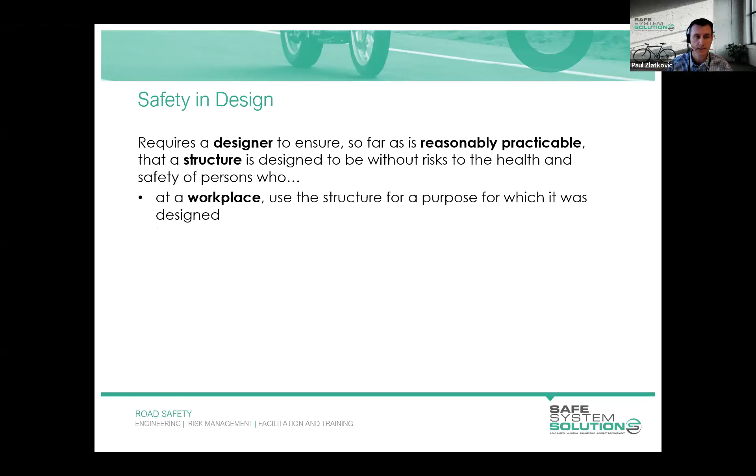So let's go. Safety in design - this is a straight up definition. It requires a designer to ensure that, as far as reasonably practicable, a structure is designed to be without risks to the health and safety of persons. There are four steps here: at a workplace, use the structure for the purpose for which it was designed; construct the structure at a workplace; and carry out any reasonably foreseeable activity at a workplace. That could be manufacturing, assembly, maintenance - a very common activity - or demolition or disposal at the end of the life of a structure.

But safety in design also relates to considering those who are in the vicinity of a workplace and are exposed to the structure, or any of those above activities.

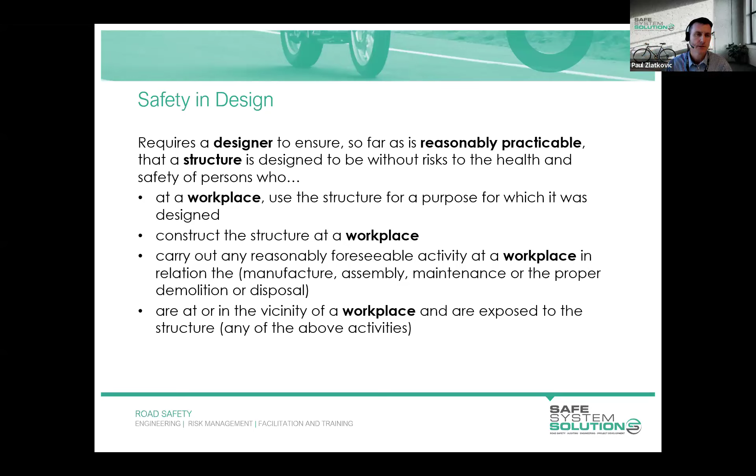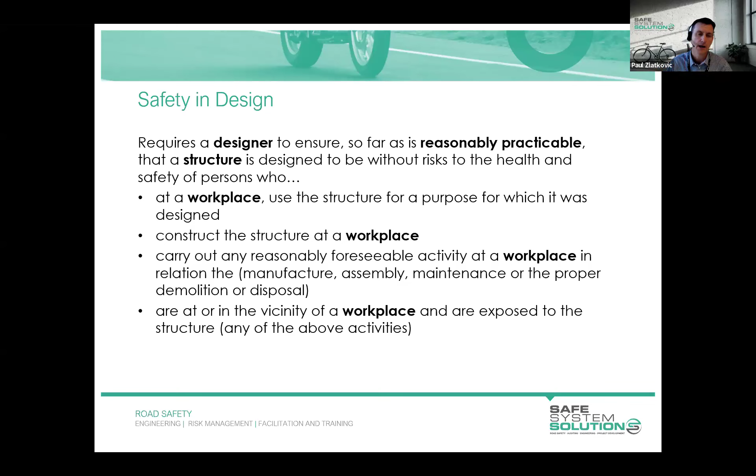You'll notice some of those terms are in bold, and it's really going to be important to have a strong understanding of them: designer, reasonably practicable, structure, and workplace. We're going to delve into what each of those terms mean, through some interactive elements, to give everyone a chance to be involved.

We're going to run a series of polls initially, and there'll be other questions where you'll be asked to contribute some answers in the chat. If you haven't found that chat window, have a look for it now. I can see that Tony's found it - he said good day. So make sure you can access the chat, and there'll also be those polls that I mentioned.

Well, it can be all those places, or it is all those places, but it's any place where work is carried out for a business or undertaking, and includes any place where a worker goes or is likely to be while at work. So under the Work Health and Safety Act, a workplace covers many places beyond the traditional view of what a workplace could be.

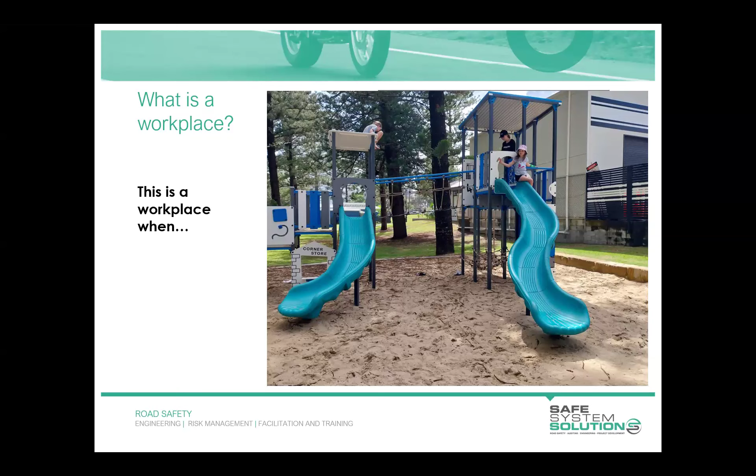I noticed this one does say single choice again, Paul. Yeah, okay, I'll have to fix that up. Sorry, I just noticed that as well. So it is select all that apply. Okay, so if you want to, there's a couple of, I'd say, correct answers there. So if you select one of those, then that'll be great. So not sure why that reverted from multi-choice to single choice. Yeah, Shannon's just advised that you can only choose one. So yep, okie doke.

All right, well we'll wrap that one up there. I think we've almost got all the responses. So noting that you can only select one, and the one that most people select is certainly correct: additional play equipment is installed in accordance with the park master plan.

The other one that was also correct is the tree next to the park was trimmed by a qualified arborist, and the assumption there, which I didn't state, is that someone trimming a tree in a park is usually engaged by council to do that, or employed by council to do that. So that is also an example of a workplace.

When children play on the equipment, it's not an example of a workplace - no one is undertaking work in that situation. Similarly, when a children's party is held in the park and food is ordered from a delivery service, it's the same principle as I mentioned with the driver: whilst they're making a delivery, their workplace is considered their vehicle. So in that case, it wouldn't be a situation where the park is a workplace.

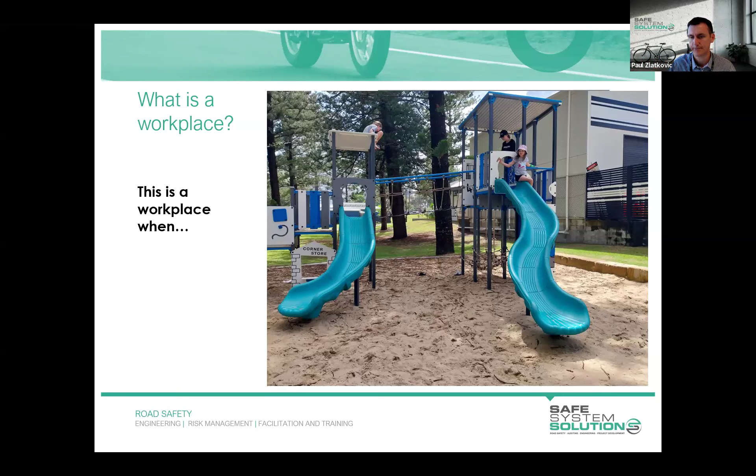Apologies for that poll. So we'll move on now and talk about what a structure is. I'm going to talk about what we think of as structures - is it buildings? Is it maybe tall buildings, bridges maybe? Because those are sort of the words we think about when we hear the word structure.

Well, yes, those are structures, but under the Work Health and Safety Act, a structure means anything that is constructed, and that could be fixed, movable, temporary or permanent. This includes buildings, masts, towers, pipelines, transport infrastructure - so that could be bridges, roads, underground works, shafts and tunnels. It includes any component of a structure or any part of a structure.

In the early days, when this form of work health and safety legislation was released, the term structure threw a lot of people off, particularly those in the road transport space, because we didn't typically refer to roads as structures. Most people thought of structures as buildings or bridges. So when that legislation came out, there was a misconception in industry for at least the initial time that, because it's referring to structures and we're doing a road, we don't really need to undertake a safety in design assessment. That's been ironed out many years ago, but just to flag that the definition of a structure is quite broad, so it's important we keep that in mind.

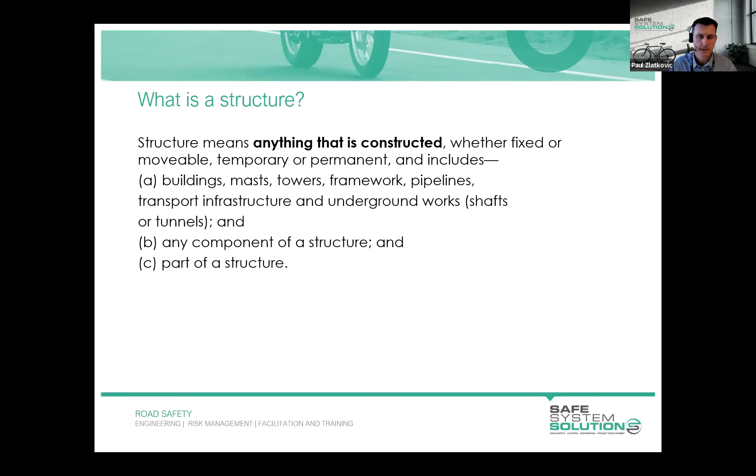So let's run with some more polls. This time I'm going to show you an image, and the poll will give you some options, and I'd like you to select all that apply. So what is a structure in this photo that you can see?

It's the Bribie Island Bridge, and you've got some options. Is it the water under the bridge itself, the dumped rock you can see in the foreground, or the pipe attached to the bridge? Let's see what we think a structure is out of those options. You can select more than one. You've got the multi-choice back on this poll.

Wonderful. Give it another 5 seconds. Excellent. Thanks, Loretta. Let's share this poll.

So wonderful. No one thought the water under the bridge was a structure, and that is correct. It hasn't been constructed. It's Pumicestone Passage, so it's a natural feature. The bridge has certainly been constructed.

The dumped rock, even though you can refer to it as dumped rock, is actually constructed, even though it looks like it's been placed in a dumped fashion. It's been placed there with a purpose. So a rather basic form of construction, I guess, but it is a structure. And the pipe attached to the bridge, so part of a structure, anything attached to the structure, another structure, would also be considered a structure.

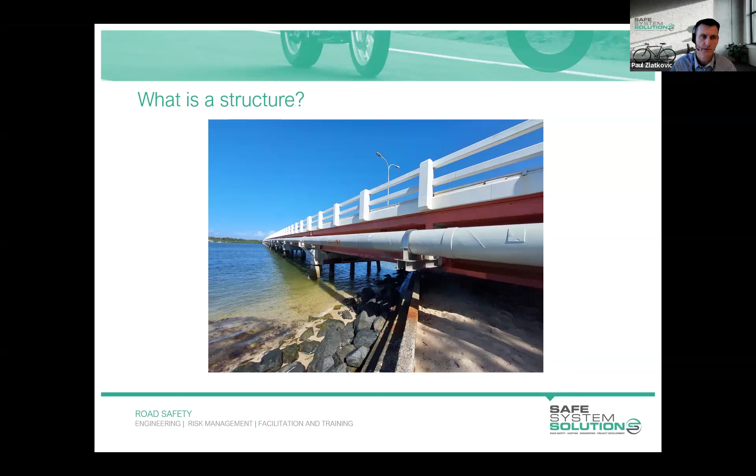Those are your options. You can select more than one. Let's get a few more answers there. And remember, you can win prizes by asking good questions or making comments. So don't be shy.

All right, let's end this poll and share the results, Loretta. There we go. Almost everyone thought the sealed part of the road was a structure. Certainly is. It's been constructed.

The trees are an interesting one. In this case, assuming those trees are pre-existing part of the natural environment, they wouldn't be considered part of a structure, or the road, if the road is the structure.

The gravel shoulder, yeah, that's been constructed as part of the road, so that's considered a structure. And the fences, even though they're quite a basic level of fence, post and wire type construction, they have been constructed. So yep, everyone's on board with that, and they are a structure.

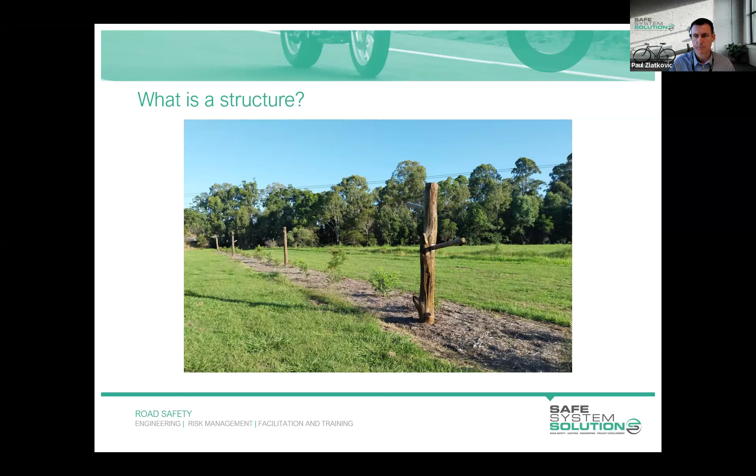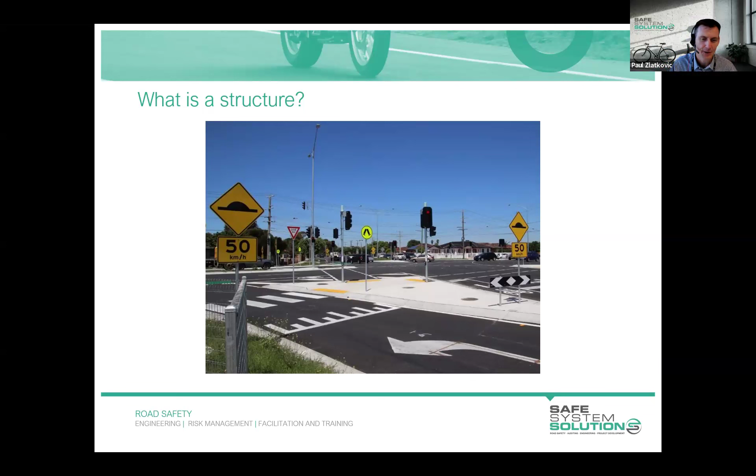All right, I think we can end that poll there. I think everyone knows what's coming up here. So sharing the results, yeah, everyone can see that this is a very built environment. I think everything in this photo has been constructed, so everything would be considered a structure. Trying to catch someone out, but I don't think I've done that in any of the groups that we've had there. So let's crack on to the next one.

Prize if anyone can tell me the road that this is, and I'll give you hints - in Moreton Bay - so that narrows it down a little bit. Narrows it down to about 200,000 kilometres of road. Can't give prizes away too easily. Campbell's Pocket, no, it's not Campbell's Pocket. Towards Samford, yeah, it's getting warmer there. Andrew, the Wynn Road, it's not Wynn Road. No, all right, I might not distract myself by looking at the answers, but we can come back to that.

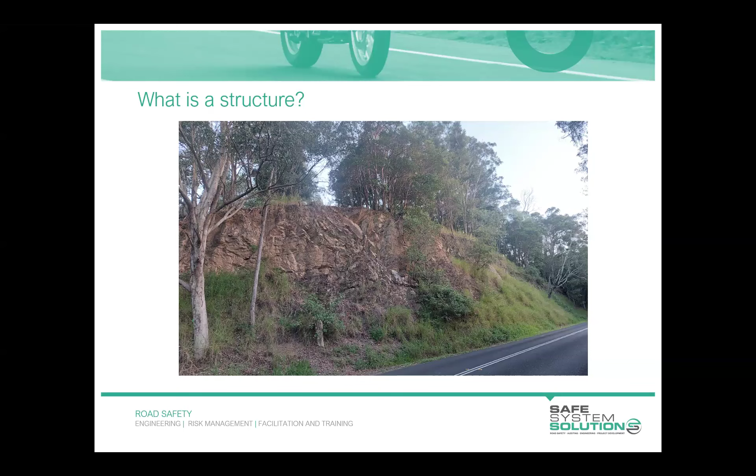Answers rolling in. We do have a question that's come in, which we might answer after this poll's done. Let's go. Okay, I think we just got it, just about everyone on that poll. So let's end the poll and share the results. So looking like we've got almost 100% across the board there, and yep, everything in that image is constructed.

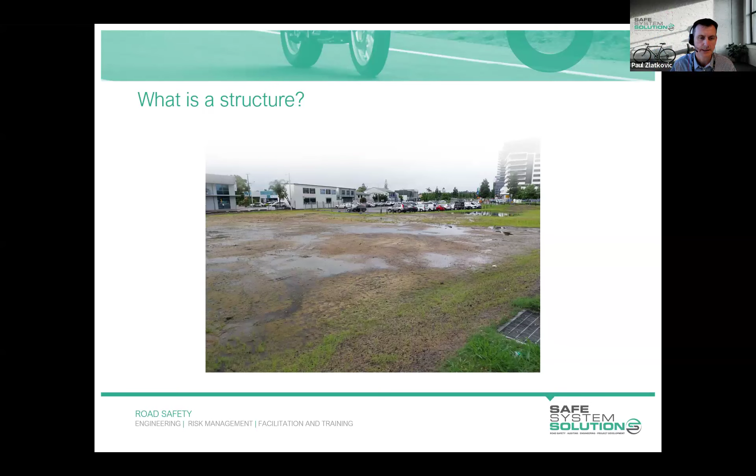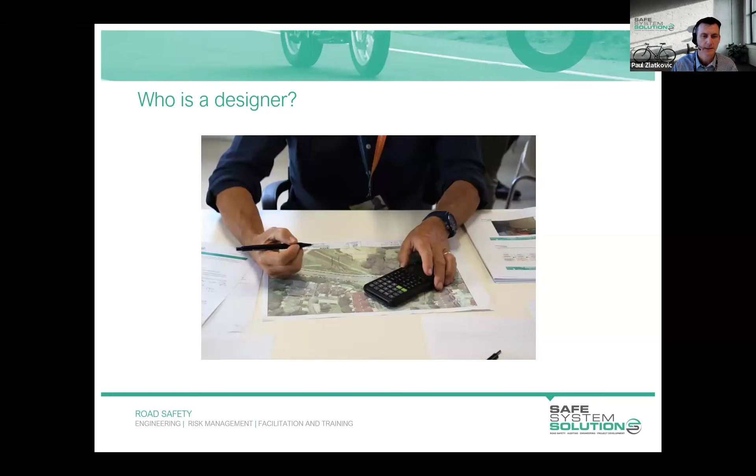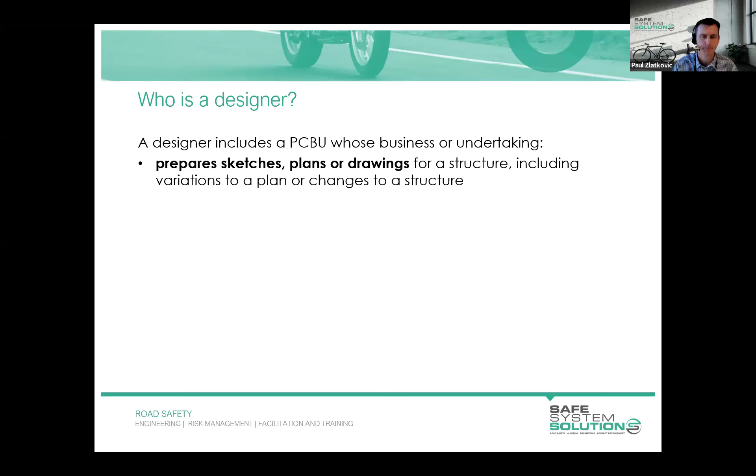Yes, they are designers, but under the Work Health and Safety Act, a designer includes a PCBU whose business or undertaking involves preparing sketches, plans, or drawings for a structure, including variations to a plan or changes to a structure. Also, anyone that makes decisions for incorporation into a design that may affect the health and safety of persons who construct, use, or carry out any of those other activities in relation to the structure.

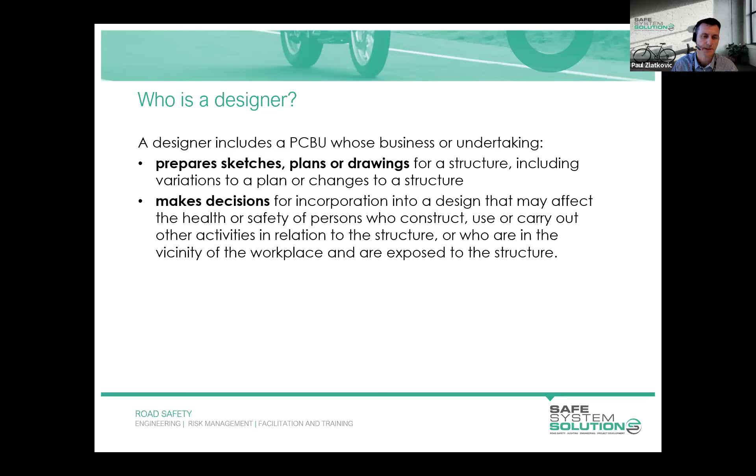So it's important to understand that the role of a designer and design activities is not just someone that is on the tools, someone making and preparing a calculation, but it can involve anyone that makes decisions around a design that can affect the health and safety of persons in relation to all those other activities - construction, maintenance, demolition, any of those activities we saw in the initial definition of safety in design.

I just want everyone in the chat now to write the name of roles that you think would be a designer under that definition in the Work Health and Safety Act. I think most of you will see where the chat window is. That's it, I can see Chris.

Landscape architect, definitely. Architect, engineer, environmental planner, yep. Traffic engineer, urban designer. I think, Marco, you said we've got parks planning today, urban design today. Majority parks planning, yep. Yeah, great. Green infrastructure, a couple of engineers and designers.

Josh is putting councillor there. Yep, we've had that one a couple of times. So if a councillor makes decisions that can affect the health and safety of a structure, then yes, they are considered a designer under the Work Health and Safety Act.

Industrial designer, your project manager, yep, Tony. That's right. If they're making decisions around the structure, around the project that they're managing, so certainly.

So I've got a bit of a list here. I think some of those have been already mentioned in the chat. Got surveyors, got town planners, civil designers. I think we've even had temporary works designers or engineers fit under that definition of designer.

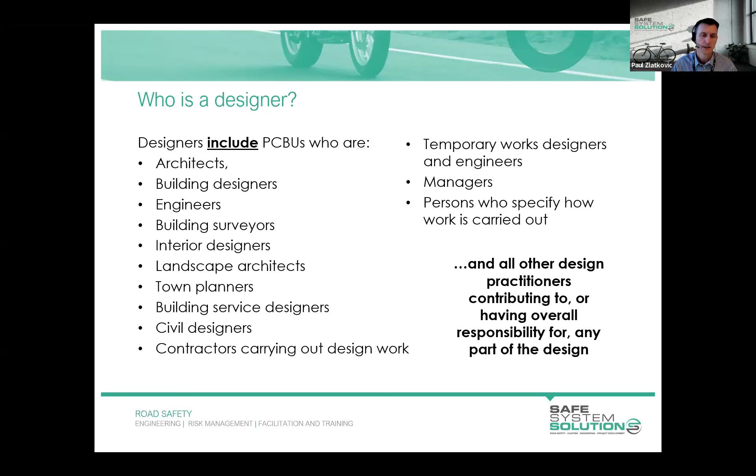So just to affirm those key points: any variations to a plan or changes to a structure - so if you're out in the field in that construction, implementation, delivery type phase, and you make changes to a plan without consulting that designer, then you take on that role of designer. As I mentioned, designer includes those who specify how work is carried out, and contractors carrying out design work.

The next point I want to talk about is the term reasonably practicable. Remember that safety in design requires a designer to ensure that so far as is reasonably practicable, a structure is designed to be without risks to health and safety.

So how do we decide what is reasonably practical? It requires consideration of the likelihood of exposure to a hazard, the degree of harm or consequence from that exposure, and the availability and suitability of ways to eliminate or minimise the risk. That in turn requires some knowledge of the hazard to identify suitable ways to eliminate it - we really need to understand the nature of the hazard we're considering. Lastly, it also requires us to consider the cost associated with eliminating or minimising the risk and whether that cost is grossly disproportionate to the risk.

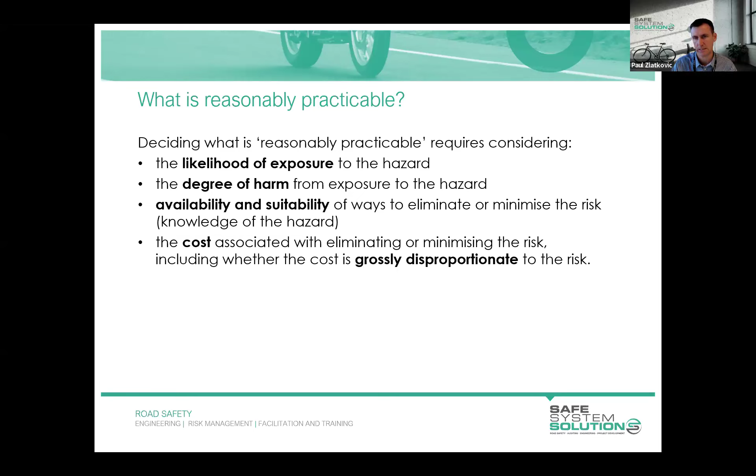So we've got more polls on the way. Let's look at this one as a first one. I'm going to describe a hazard associated with that photo, describe a risk, and the poll will give us a number of ways that may or may not be reasonably practicable ways to eliminate or minimise the risk.

In this case, the photo describes a road with some overhead lighting. The hazard is working at heights, and the risk event is someone falling from height while changing a light fixture.

So we're going to have a look at that poll now. Loretta, not going to make that mistake again. If you could launch the poll - there it is.

Let's have a look at those options there. If you think that one of those options is a reasonably practical way of eliminating or minimising the risk of a worker falling from height whilst they're up there changing a light fixture, then select it. You can select more than one, so there might be more than one reasonably practical way to minimise or eliminate that risk.

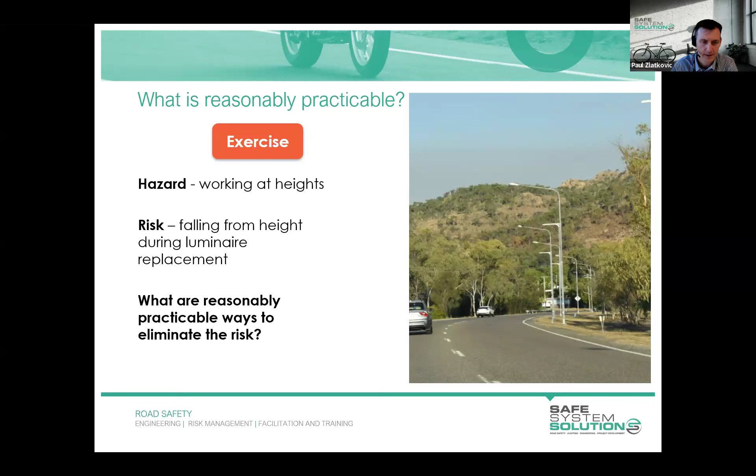Let's jump into the next example there. In this case, our exercise is looking at a hazard, which is working near water.

So this is a cliff stabilisation project, or a photo from a project, and it's at Scarborough. It's one of the designs in your small group exercise tomorrow, so some of you might be in a group that is looking at this design.

So the hazard is working near water. We're in a coastal area, we've got some tidal influence there, so it'll be sort of high tide, low tide type action. The risk is drowning, and I've got that as drowning when working on the cliff stabilisation. It could just be you're inundated by water, and I guess drowning is one outcome, one consequence, but it could be certain other consequences there.

Let's launch the poll and see what options there are. So what could be some reasonably practical ways to minimise that risk of drowning when working on the project down there at sort of sea level or beach level? So the options are: work only during low tide periods, construct a temporary cofferdam in Moreton Bay for the limits of the project, use a lookout to warn of big waves, and undertake works from the cliff top.

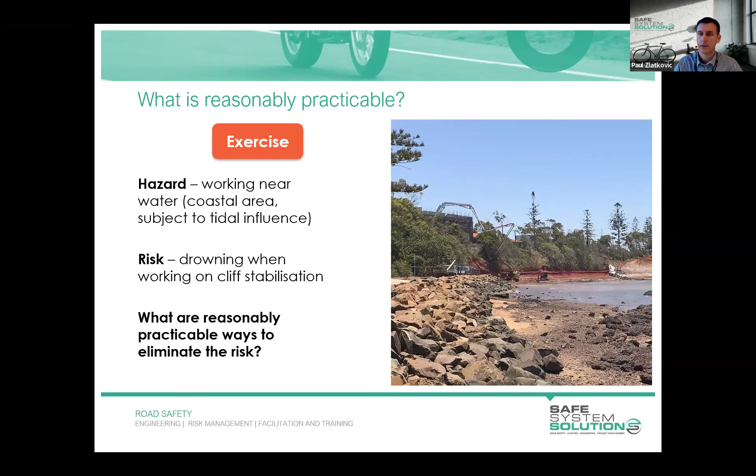Undertake works from the top of the cliff - yeah, that certainly is an option there, and you can see that the concrete pump is positioned in the photo on the top of the cliff. So there's certainly an element of some works that could be undertaken from the top of the cliff. Maybe not all the work, but certainly some of it. So well done, let's go to the next one.

But in this situation, the hazard that I've identified is working near live traffic, and the risk is a vehicle that is passing crashes into workers maintaining that landscape median. So let's look at the options in the next poll and see if we think they are reasonably practical ways to eliminate or minimise the risk.

Option 1: maintain the median when the road is closed with diversions in place. Place warning signs of workers on the road. Use a lookout to warn of errant vehicles. Use a median treatment that does not require maintenance by workers on the ground.

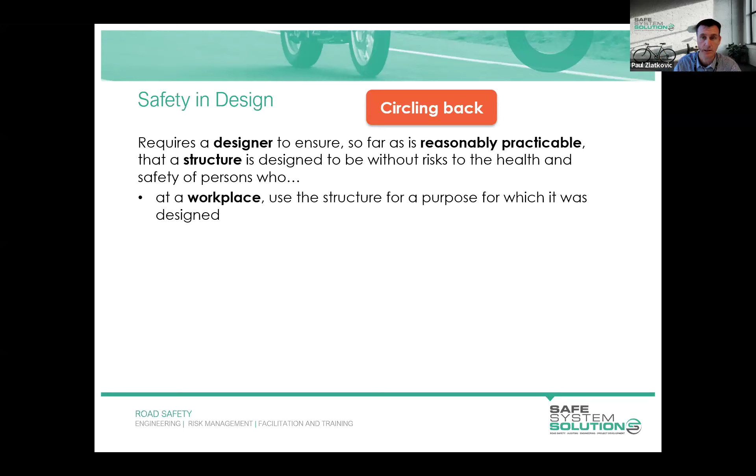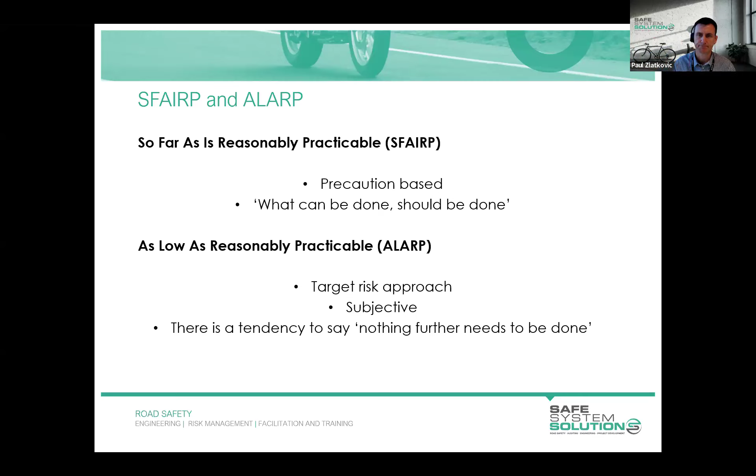Moving on to the next consideration, around knowledge and capability. Many of the projects you see these days are often quite complex, and there's an increasing tendency for this, so it's often the case that not just one person has a full understanding of the project. In terms of our roles in the engineering world, over the years there's been a greater move to specialisation in technical disciplines for a range of reasons.

So that combination of projects being more complex, and a tendency toward specialised roles in engineering disciplines, makes it really unlikely that one person will have a full and complete understanding of a design project. In practice, that means safety in design is not a one-person job - it involves a group, a small team of people, so that a full knowledge set and capability is represented when we undertake our safety in design assessment.

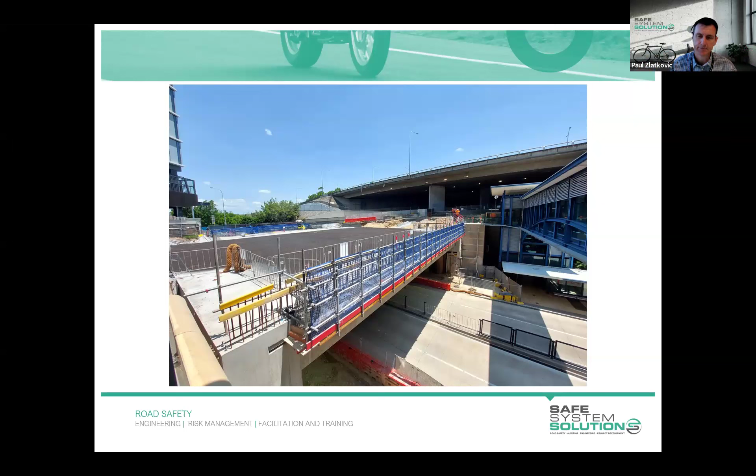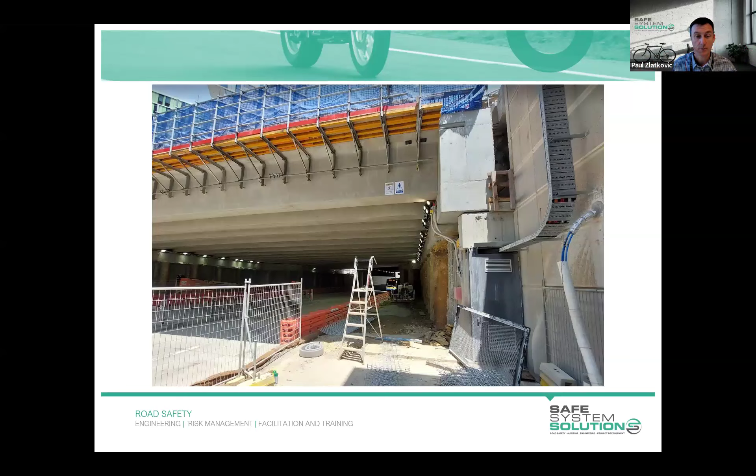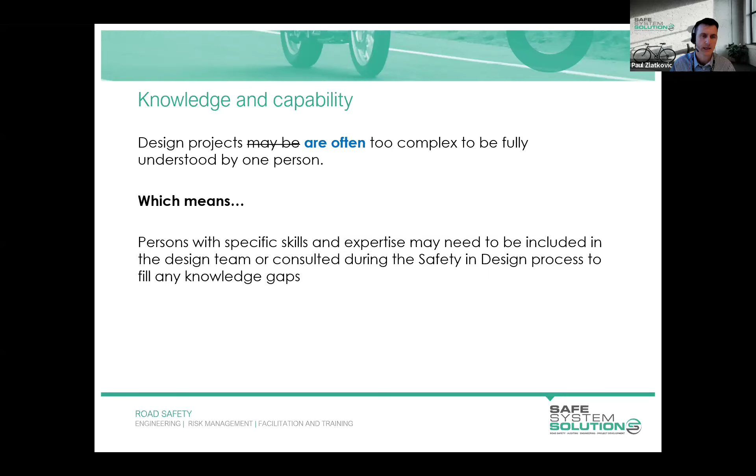Design projects are often nowadays very complex, too complex to be fully understood by one person. So we need to make sure persons with specific skills and expertise are included in a design team, or consulted with during the Safety in Design process, to make sure there's no gaps in knowledge. I've been involved in Safety in Design assessments that have included anywhere from 3 or 4 people up to around 25 people for very large scale projects, and that's necessary to get all skills represented when we undertake our Safety in Design assessment.

So this is a very incomplete list, just a number of skill areas I could think up on the fly that might be involved in some of the projects undertaken by the City of Moreton Bay. If you know of any skill areas not on this list that you would use at council, just pop them in the chat.

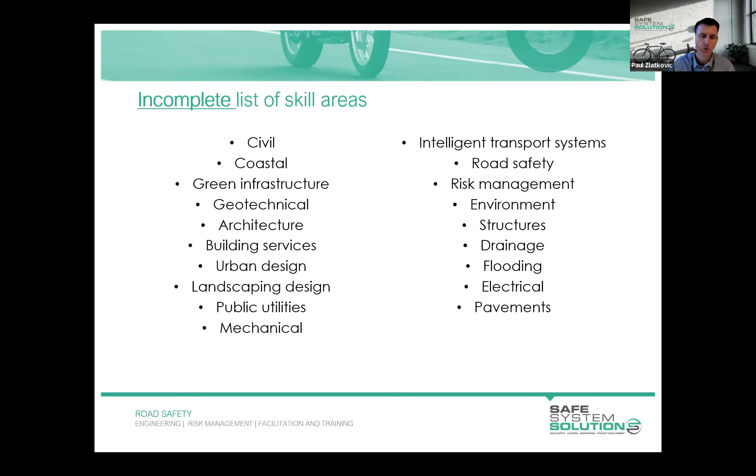We'll move on to an activity where we'll have a look at a few photos. As a group, we can identify some of the skill areas that would have been required or involved in the design of these structures, and in turn those are the skill areas that would expect to be represented in a Safety in Design process.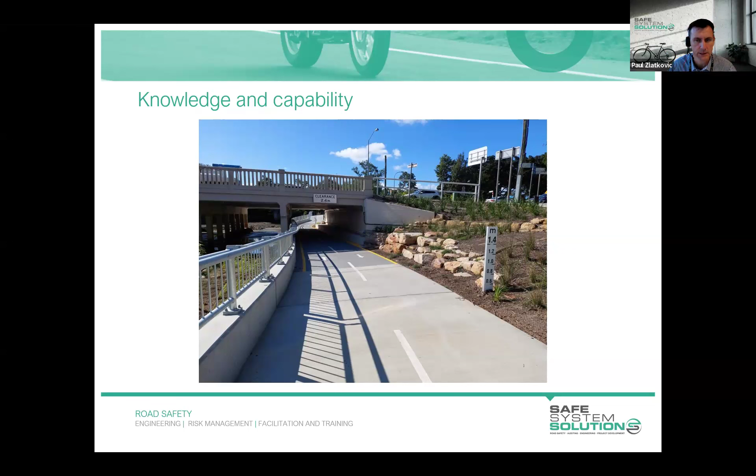I won't give another prize away for this. It is Old North Road again, not far away from those koala resting poles we saw earlier. So in the chat, let's identify some of those skill areas, those knowledge areas that would have been required for the design of this part of Old North Road.

Traffic, AT, there's a transition ramp there, yep. Energex Powerlink, yep, spot on. Ryan: electrical, civil designer. Yeah, active transport, green infrastructure. There's a culvert there, you can't really see it from the photo, but maybe the location. There's fauna fencing above the culvert, so access to maintain that fencing is important. So seeking the input of someone with green infrastructure experience, landscape architect, urban planner, structural engineer, landscape architects, urban designers for planning input. Yep, that's spot on. Wonderful.

Okay, let's go to the next example here to get our thinking caps on. For this one, a bit of a unique situation: the Bribie Island Bridge that you saw in an earlier photo, and this is on the island side. It's another shared path, and this shared path has been retrofitted under the bridge, which has been there for a long time, so it sneaks under the bridge to provide a continuous path along the island side of the bridge. So who would we need to involve in this case to make sure we've got the complete knowledge and capability around this structure?

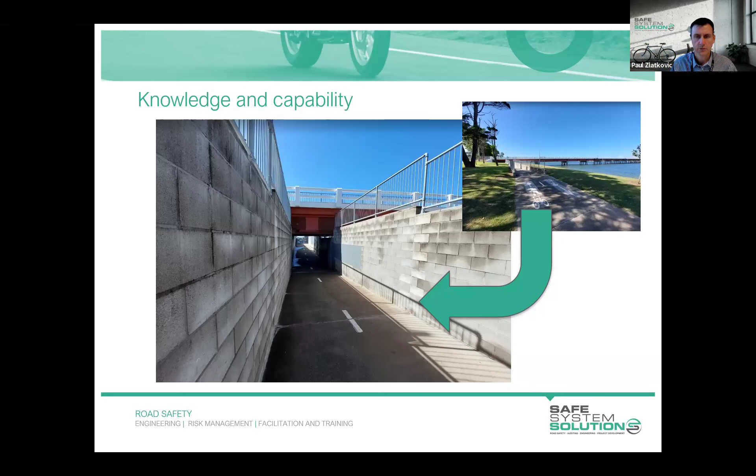Okay, that rolls us nicely into the next consideration. Hand in hand with the capabilities of designers, those skill and knowledge areas we're talking about, it's also necessary to draw on the knowledge and experience of others, and that can include manufacturers, suppliers, and importantly workers - workers that construct a structure, workers that maintain a structure. Remember, any of those other activities that will occur once the structure is constructed need to be considered. So by involving those workers that will actually do the work, we add to that pool of knowledge that we have when undertaking a safety in design assessment.

It's really important that it's more than that - actually, it's a legal requirement that workers are consulted as part of the safety in design process.

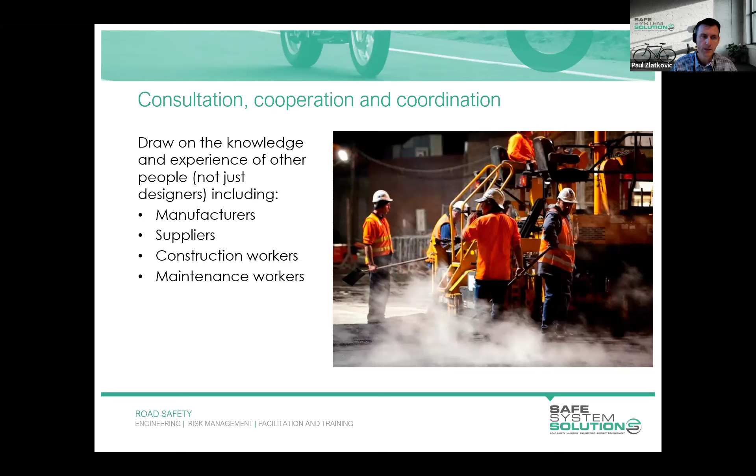You think it might be a good idea, so you're thinking of using it as part of your design. If that were the case and you didn't have the knowledge of that product, then you really need to involve those manufacturers and suppliers in your safety in design process. Consult with them so that we don't have any knowledge gaps when doing our safety in design assessment. So it's really important that we think about workers and also those manufacturers and suppliers of the elements of our design.

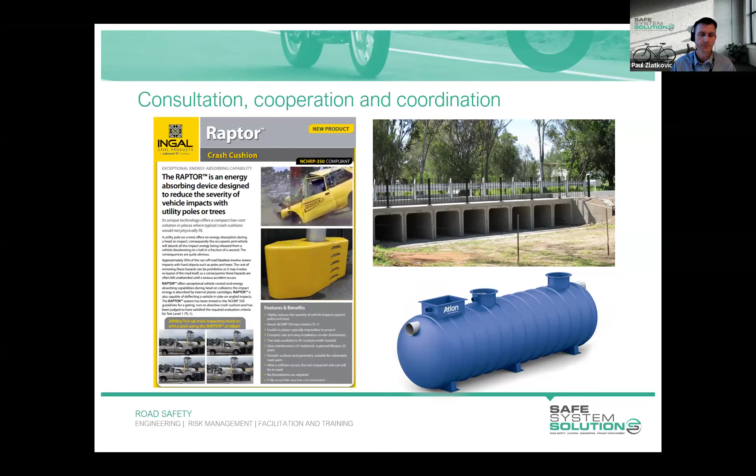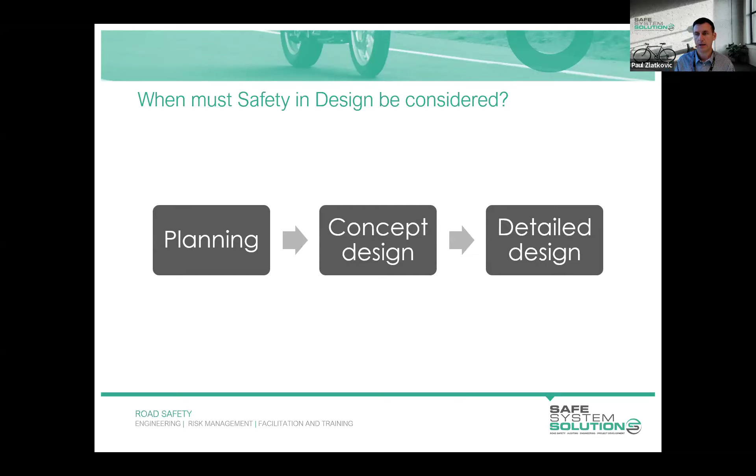So we'll run another poll here. The question is: when must safety in design be considered? We've got the three phases of council's design life cycle - planning, concept design, and detailed design. So Loretta's started that next poll, which asks at what time in the planning or design of a project should the consideration of safety in design commence.

So as early as possible is an option, after a request from a contractor - so once they've started construction, you need to get them that safety in design report, once they've requested it. That's one option. When you've got through 75% of your detailed design is another option - you really know about the design by that stage, or after the design is certified. Sorry, I've jumped around in the order there a little bit.

So I think there is a clear answer there, and I can see it appearing. So we can end the poll there. I don't think I was able to fool anyone, but of course it's as early as possible in the design process. And the reason we do that is that the early stages of a design provide the greatest ability for us to influence the design outcome, and importantly, influence the health and safety attributes of a design.

So when a design reaches a more detailed level of maturity, it's very hard to make changes without impacts to cost and time. So whilst we say as early as possible, there's an acknowledgement that in the planning phase of a project, particularly in the very early stages of strategic planning, you won't have a lot of design definition or design maturity, but that shouldn't stop you from starting to consider safety in design. We'll talk more about that in module 2 when discussing how we apply our safety in design process. It's really important we start thinking about it early, even if we don't have a lot of design development under our belt.

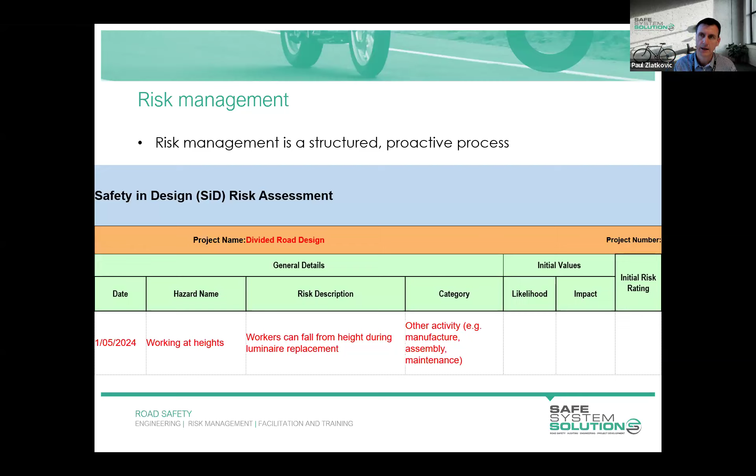Some common questions I've heard along my career: can we combine our project risk assessment with our safety in design risk assessment? Can we have a combined safety in design and risk workshop? I really think it's important that we keep safety in design separate, because it's quite a distinct consideration of workplace risk. And if we start involving some of the other risks - that might be reputational risk, risk to environment, risks around end users not in a workplace setting - if we start mixing it all together, it can become somewhat confusing. So it's really important to undertake a separate safety in design risk assessment.

So some hazards and their associated risks are pretty well known. We understand that, particularly in construction, there will be risks, and when we're aware of a risk and its effective control is known, then we can implement those controls without undertaking additional risk assessment. The benefit of this is that it allows us to focus our safety in design assessment on the more unusual or atypical aspects of a project that might involve a new process, a new material, or a new product. We can focus on those without reinventing the wheel in terms of risks that are well known, where we have effective controls.

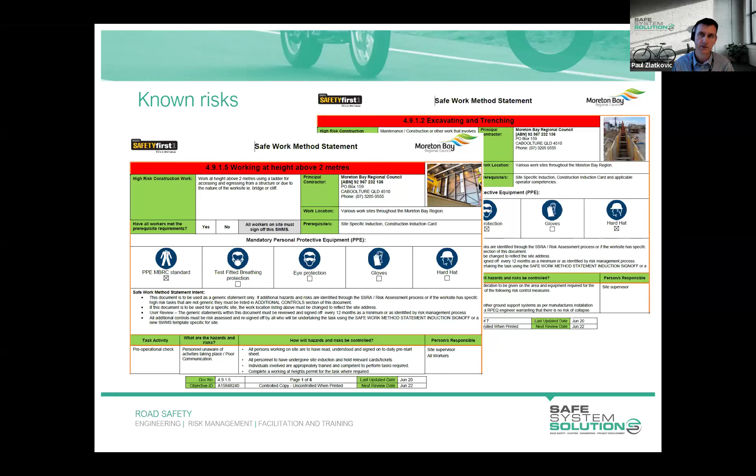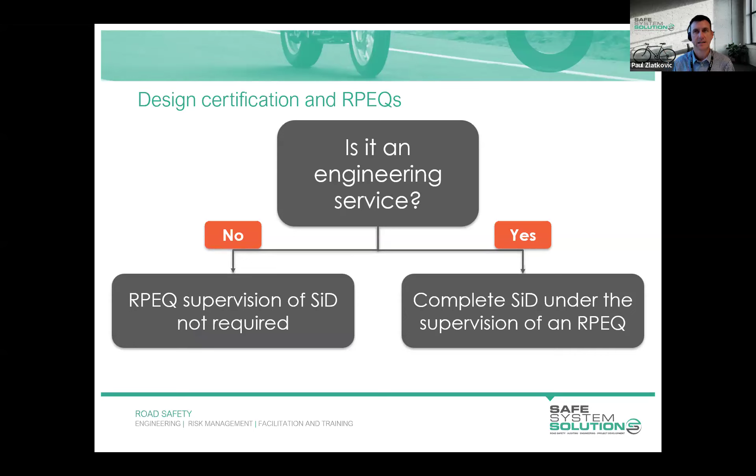Almost at the end of the module, one last thing, and then we're going to look ahead into our small group exercise for tomorrow. So the last other consideration I'd like to touch on is a question around design certification and the involvement of RPEQs, the Registered Professional Engineers of Queensland, in the safety in design process. So for safety in design, the approach is that if it's an engineering service, there'll be an RPEQ involved. That's a requirement of the Professional Engineers Act in Queensland.

If there's an RPEQ involved in your project, then the safety in design assessment must be completed under the supervision of that RPEQ. I'd find it surprising if there was an RPEQ involved in a project who didn't want to be involved in the safety in design assessment because of its importance.

So on the other hand, if it's not an engineering service that's been carried out and it doesn't require RPEQ certification, then there's no requirement to have an RPEQ involved in the safety in design process.

So I think there was some examples mentioned in the chat the other day, Marco, of projects that didn't require certification. I can't quite recall what they are. Well, I guess we've got the parks team here, so if they were doing a playground upgrade, I don't think that needs an RPEQ because all the structures are pre-made and pre-designed, and then they'll be doing the layout work and stuff like that.

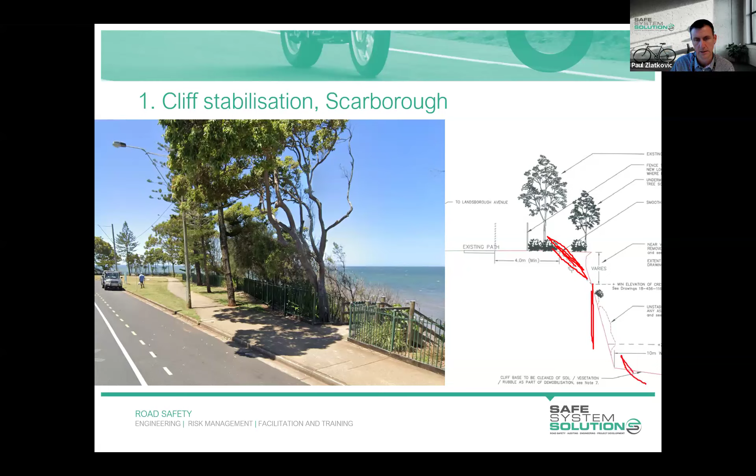So the first project is a cliff stabilization at Scarborough. We saw that photo earlier from the bottom of those cliffs where that work has actually been undertaken. The project involves three parts: removal of the unstable crest at the top of the cliff, removal of some unstable midsections, and some concrete protection applied at the base of the cliff.

The next project - I think someone worked on this, was it Tom? That's Cedar Creek Road upgrade. So yes, it was Tom. If Tom gets this project he'll probably have some of the answers, so it'll be his lucky day. Tom would know this project better than I would, but I'll do my best to describe it from what I can see of the design. So it's widening Cedar Creek Road.

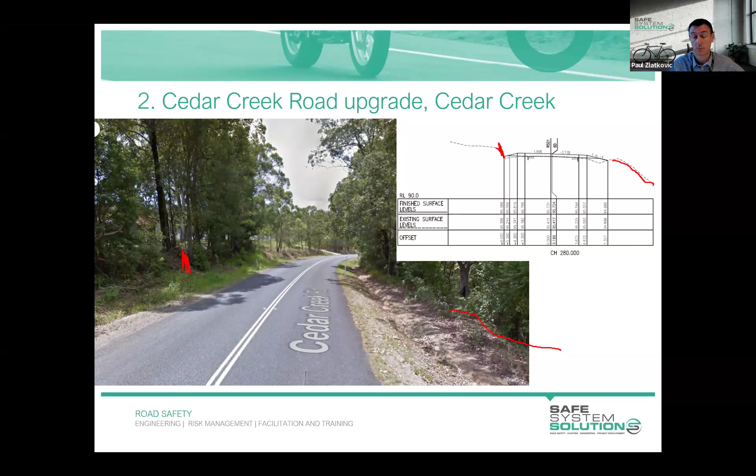The cross section you can see here is about where this street view image sits. There's some widening to both sides of that existing carriageway. There's a bit of a bank that falls away down here, and you can see the start of that in the photo. There's a bit of a cutting back up here that's existing where these trees are sitting as well. So fairly straightforward road widening project. It is a one-way in, one-way out catchment, I'm told, so that might come into some of those considerations around what's reasonably practical when you're managing live traffic.

Number 3 is a bioretention decommissioning at Bray Park. This is an interesting one. There's an existing little basin there that's sort of a long rectangular shape, with sandstone blocks that form the basin, so it's quite deep. The new pipe that's going to be installed to replace the existing basin is 1050, so just over a metre in diameter, so the existing basin could be about two metres deep. There's a bus bay up here, some houses and some paths as well.

I guess the exposure from the workplace activities to others will be a consideration, as part of that safety and design assessment.

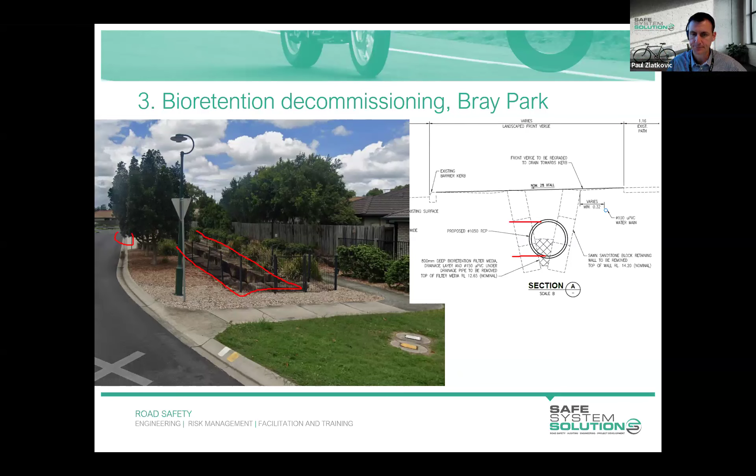Next one, this is a LATM and stormwater renewal project at Woody Point. There's a hotel here on one side and some high-rise apartments on the other side. The project involves some median planting, which is the LATM aspect, and some stormwater pipes will be installed in the road carriageway. There are services here, so likely that would be a consideration of traffic and also the interaction with any existing services.

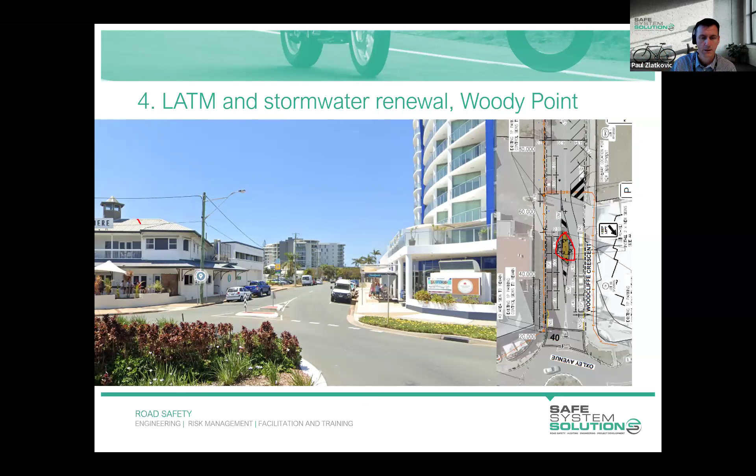Just a couple more to get through here. We've got fauna infrastructure at Eatons Hill - this is a post and rail fauna crossing in a culvert, which we can see at the top through here, probably through this embankment there somewhere. We've also got another post and rail fence under this bridge structure you can see in this area. Also under the bridge is a fauna rope bridge, that's the red dashed line under there. So there's certainly a few different green infrastructure elements going on here. We're probably well placed with the skills we've got to identify some of those safety and design considerations for this project.

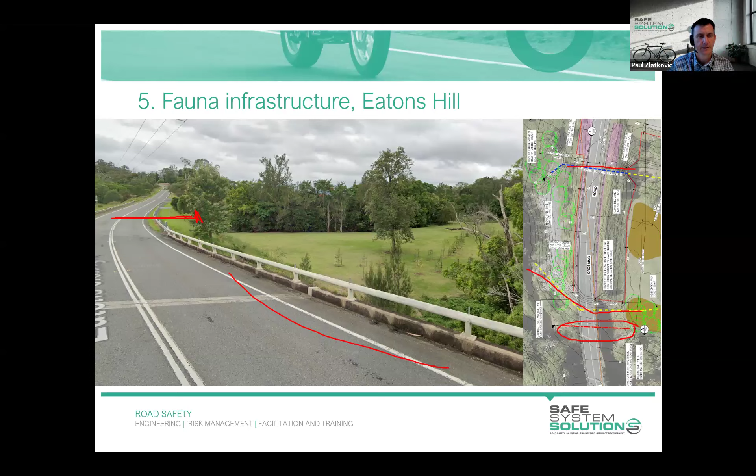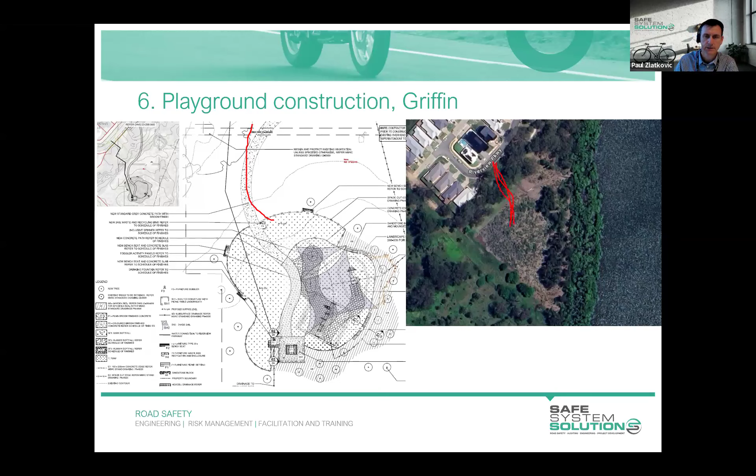And this is the last one - I think we'll only get up to 6 groups if we get up to 6. So this is a playground construction at Griffin. You can see that's the outline - there's details around bins and fountains, shelters. There's an indicative footpath alignment here, which I think connects down to that area of houses. You've got the Pine River just over here as well. So that is the playground construction project.